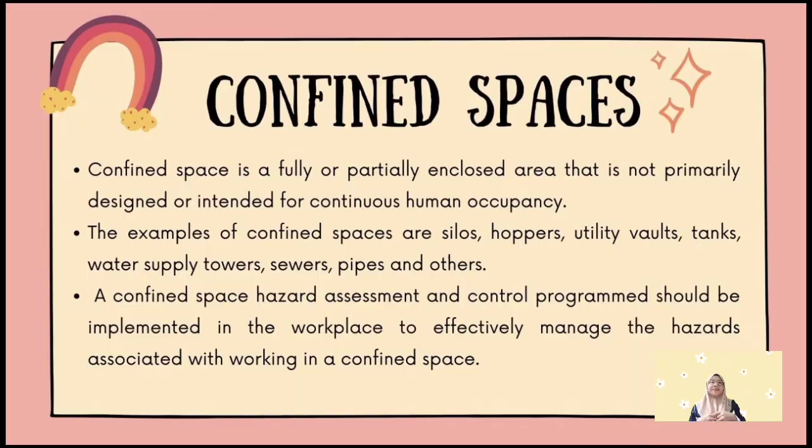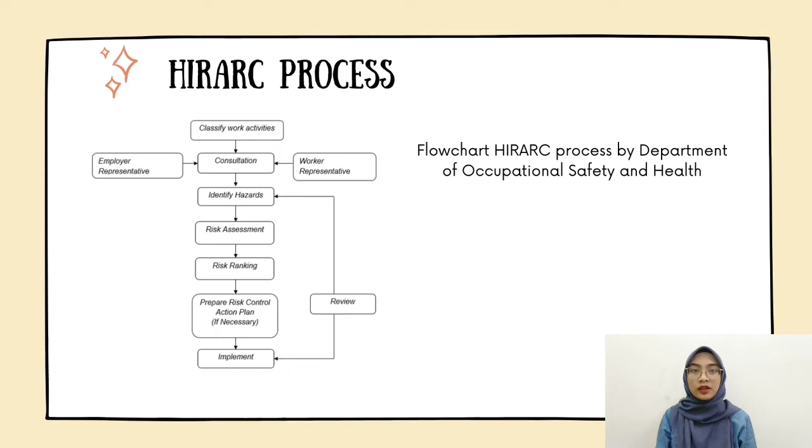HIRARC is the basis of occupational safety and health. The activities consist of hazard identification, risk assessment, and risk control. HIRARC should be finished first before beginning any works, especially in the construction industry where major accidents and injuries happen. HIRARC is a technique to become aware of any dangers at the workplace. This is the flowchart of the HIRARC process by the Department of Occupational Safety and Health, DOSH.

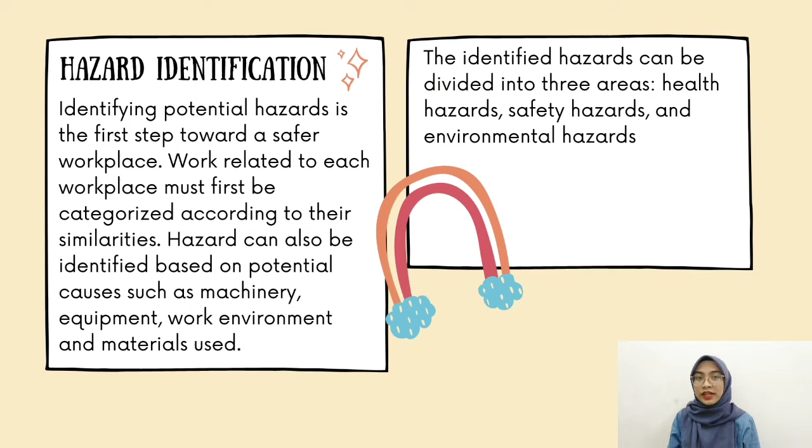Identifying potential hazard is the first step toward a safer workplace. Hazards can be identified based on potential causes such as machinery, equipment, work environment, and material used. The identified hazard can be divided into 3 areas: health hazard, safety hazard, and environmental hazard.

Risk is defined as the likelihood of a hazard, and a workplace risk assessment involves the process of calculating the likelihood and severity of the identified hazard. The relative risk can be calculated using the formula: relative risk equals L multiplied by S, where L is likelihood and S is severity.

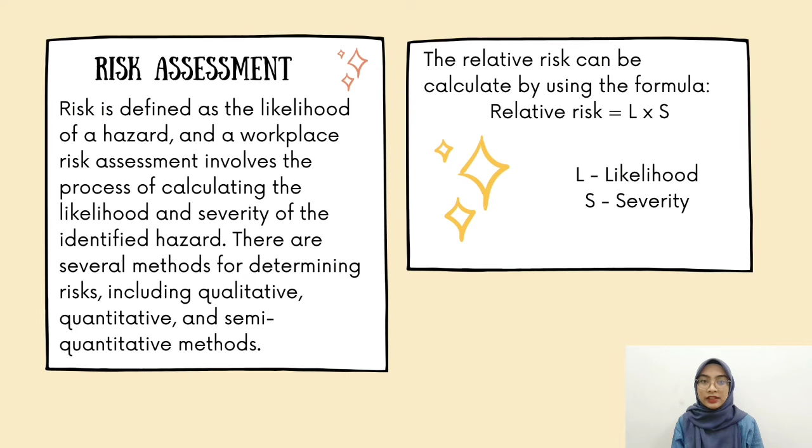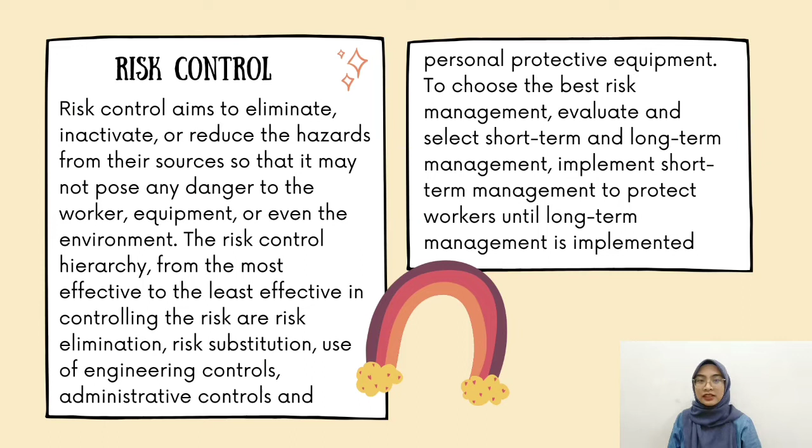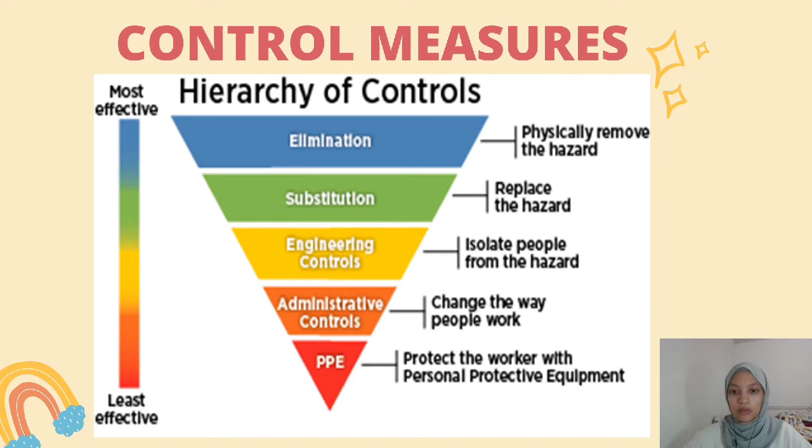And the last one is PPE, to protect the worker with personal protective equipment.

Okay, let's move to the risk estimation and risk evaluation. The first one is the risk matrix table. This table contains severity and likelihood, which range from 1 to 5. The risk matrix table contains 3 colors: red for high, yellow for medium, and green for low.

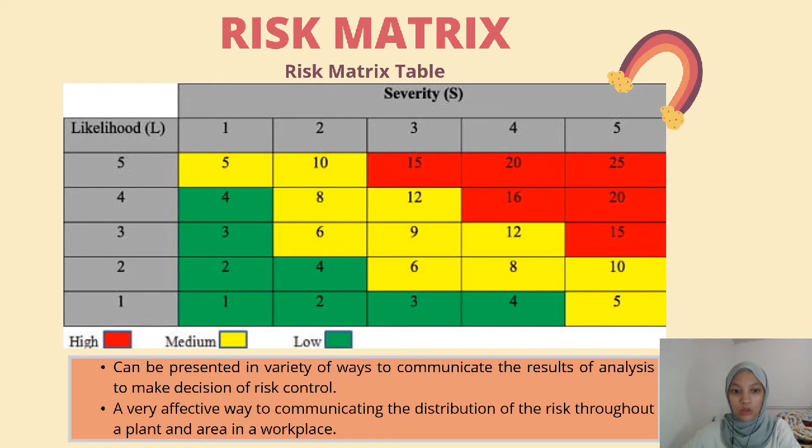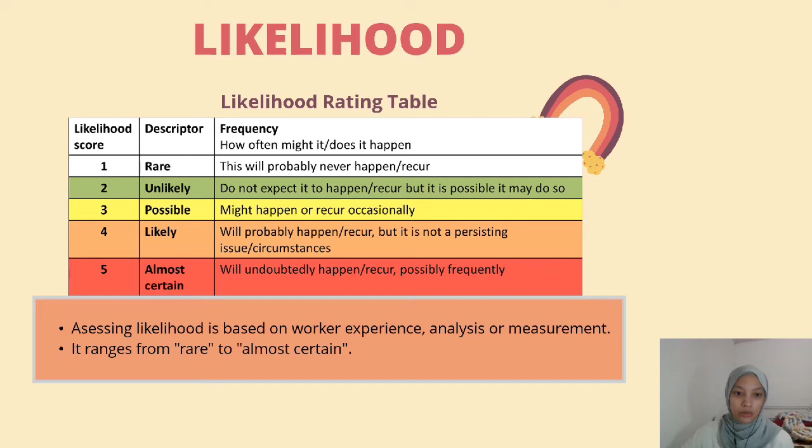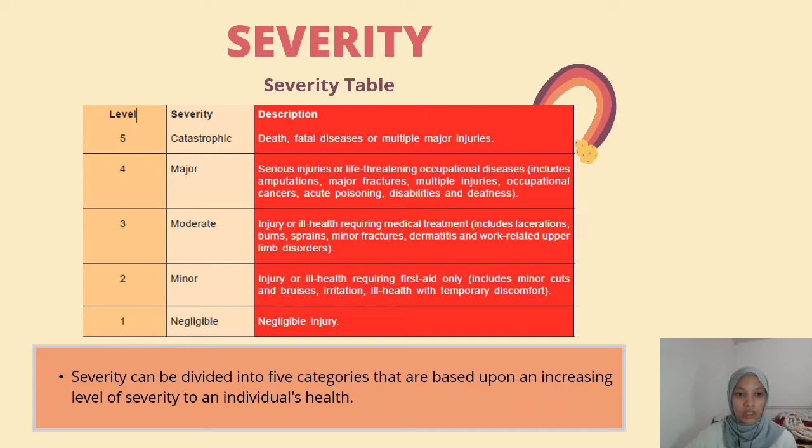Next is the severity table. Severity can be divided into 5 categories, based upon an increasing level of severity to an individual: 1 is negligible, 2 is minor, 3 is moderate, 4 is major, and 5 is catastrophic.

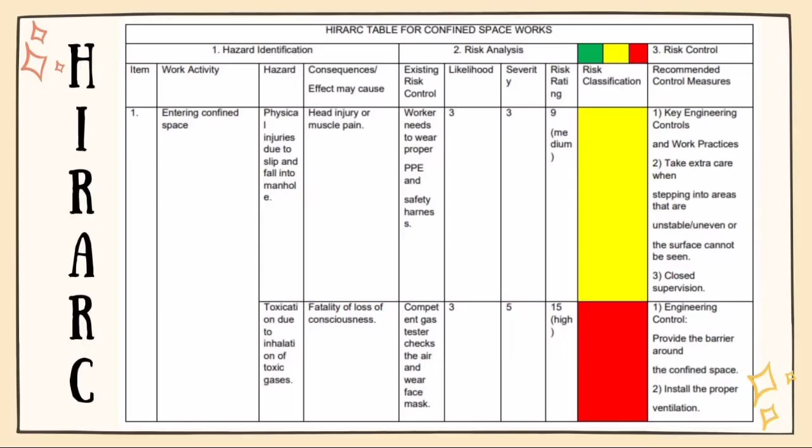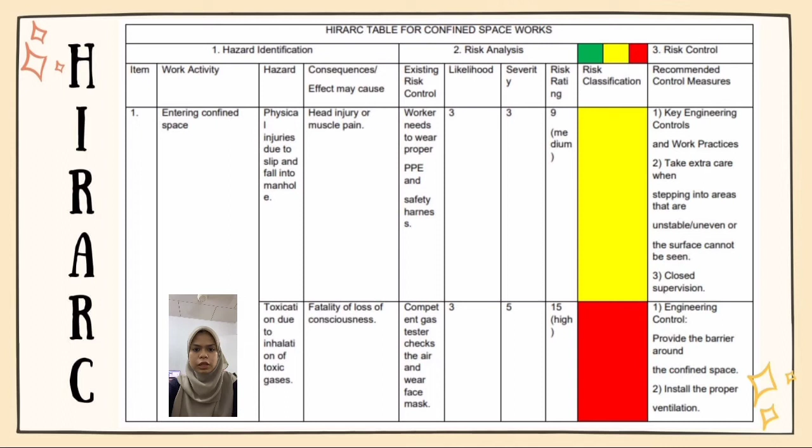Firstly, entering confined space. The first hazard is physical injuries due to slip and fall into a manhole, with medium risk classification. Second hazard is toxication due to inhalation of toxic gases, classified as high risk. Third hazard is electrocution due to faulty wiring or electric leakage, classified as high risk. Last hazard is body cut by sharp object, classified as medium risk.

Next, the second work activity is mobilizing material or equipment into confined space. First hazard is hand injuries that might occur when workers unload materials, classified as low risk. Second hazard is being hit by a moving object, classified as medium risk. Last hazard is sudden body injuries due to excessive load weight, classified as low risk. Third work activity is working in confined space.

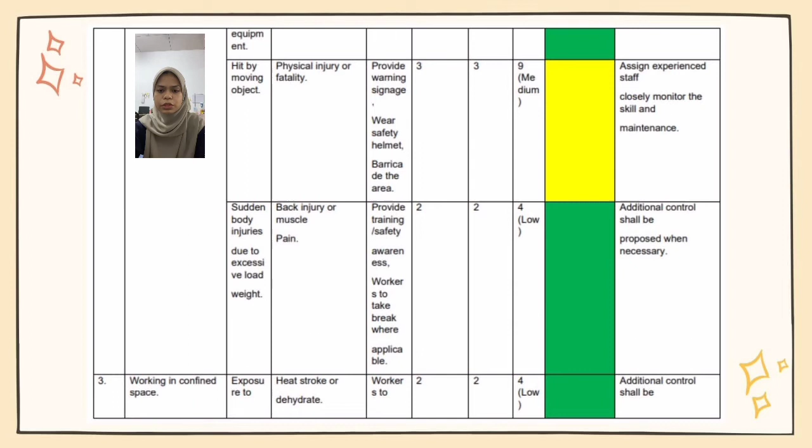The first hazard is exposure to sun, classified as low risk. Second hazard is being buried alive due to slope collapse of earth, solid material, or fluid, classified as high risk. Third hazard is inhalation of carbon monoxide, classified as medium risk.

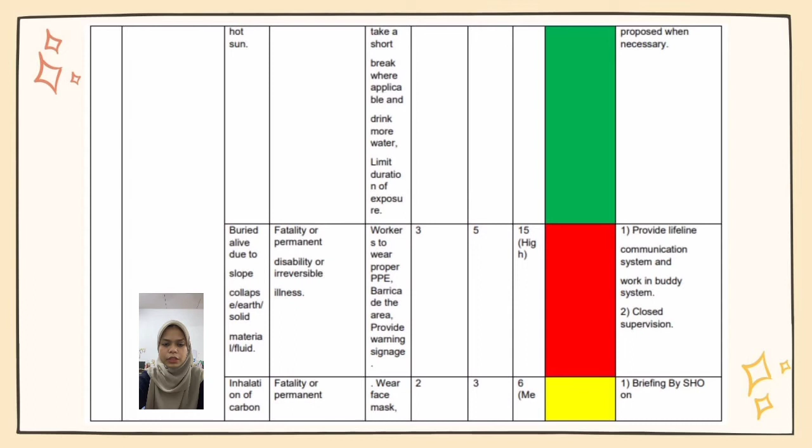Last work activity is inspection, finishing up and exiting from confined space. First hazard is trip or fall into manhole during inspection, classified as medium risk. Second hazard is failure or collapse of ground or material, also classified as medium risk. Third hazard for this last activity is space constraint, and the risk classification is based on the HIRARC table.

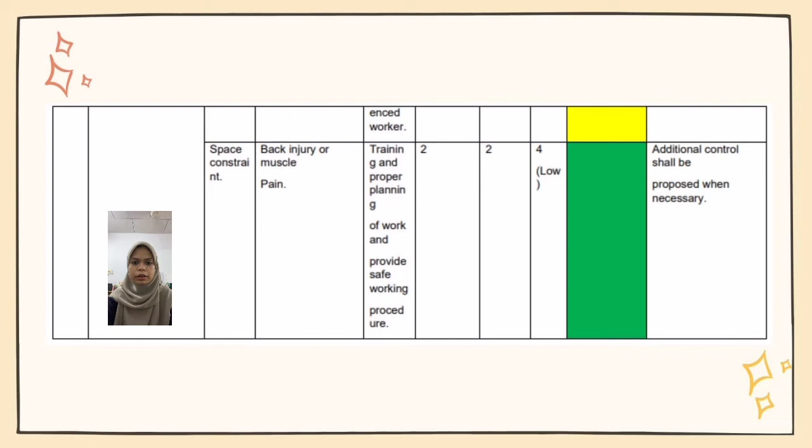The most critical safety hazard is getting buried alive by a falling slope, earth, solid material, or liquid. This risk has a score of 15, which means it is quite dangerous. Many lives are lost because people are buried alive in trenches. The risk of this kind of work is higher because the falling soil can bury or crush anyone in its way, killing them by suffocation or causing internal crush injuries.

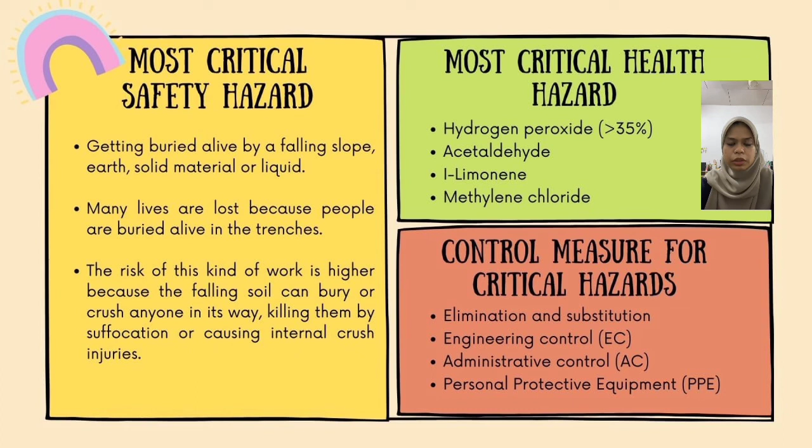Elimination and substitution, administrative control, and personal protective equipment.

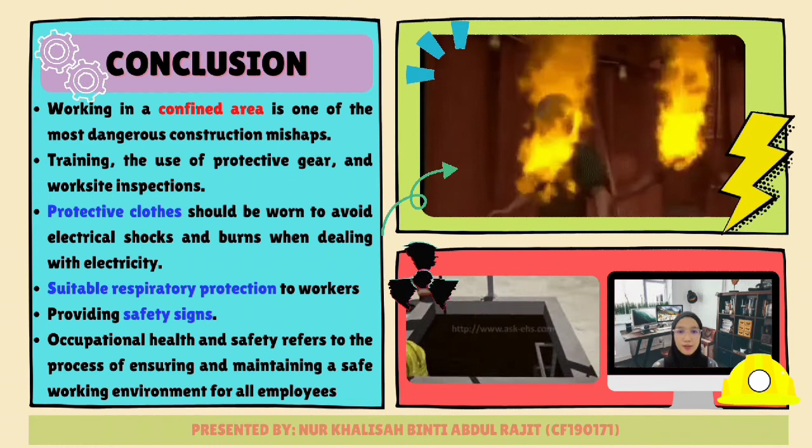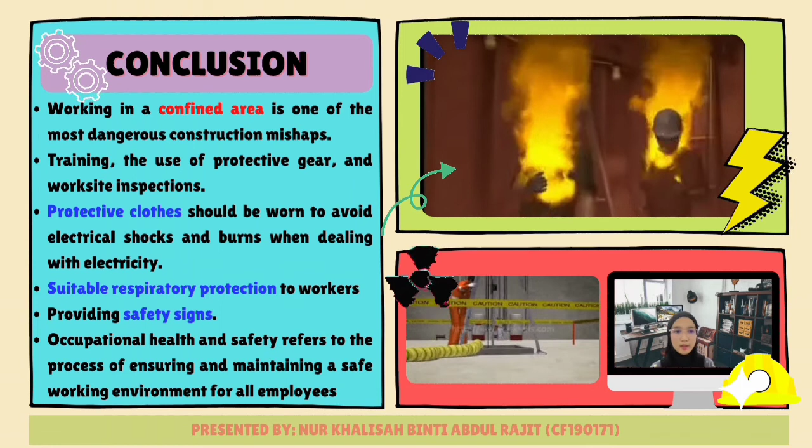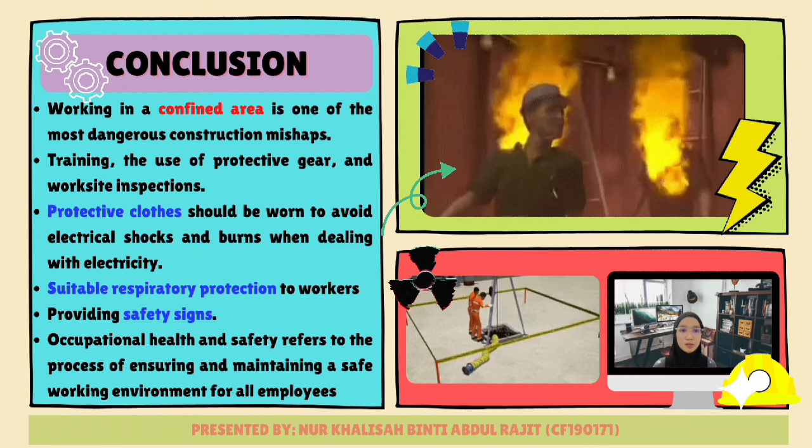Working within a confined space, as shown on my right, can be associated with critical safety hazards like electrocution due to defective wiring and being buried alive due to slope collapse. Meanwhile, the critical health risks include hazardous chemical exposure. Therefore, proper training and the use of protective gear must be done.

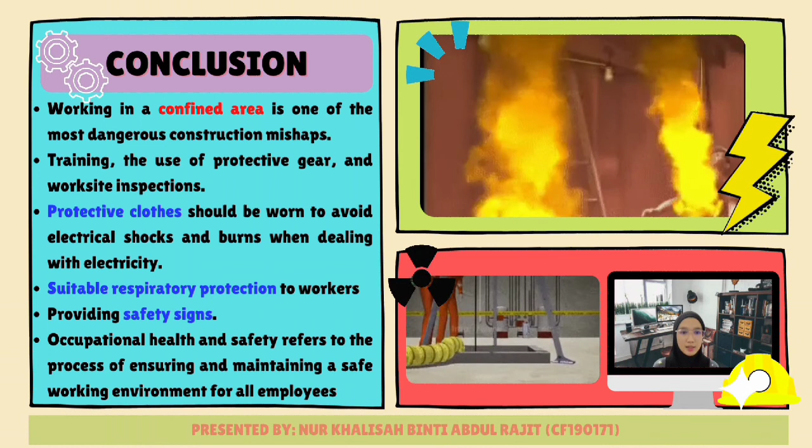For example, protective clothes should be worn to avoid electrical shocks and burns, just like in the GIF above, when dealing with electricity. Suitable respiratory protection should be prepared when dealing with hazardous chemicals, followed by providing safety signs. Thus, maintaining a safe working environment is very crucial because there is always the risk of an accident.

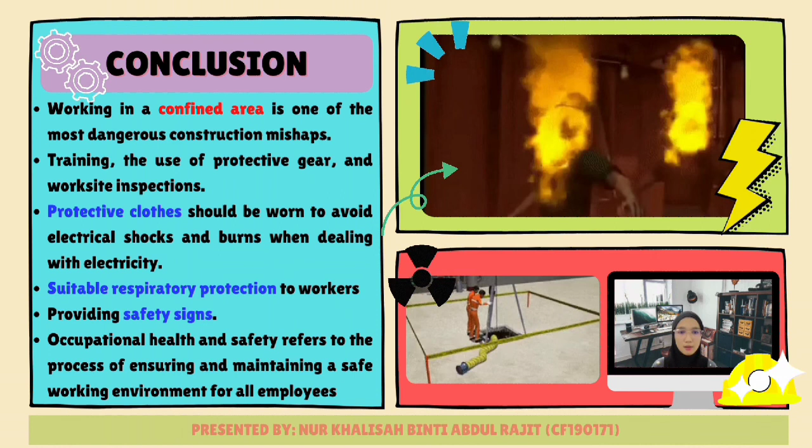No work environment can be fully free from injuries and danger. And that is all from us. Thank you.